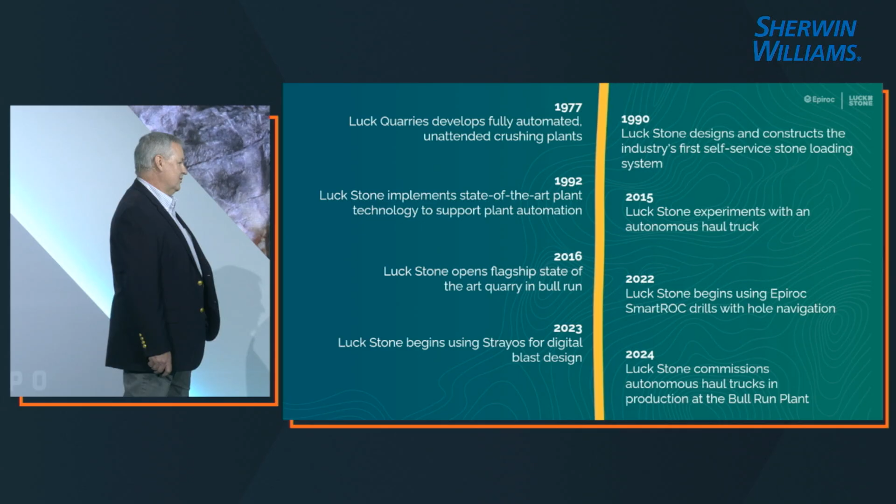In 1990, we designed and constructed the industry's first self-serve stone loading system for our customers' trucks. And 2 years later, in 92, we developed state-of-the-art plant technology to enhance the way our plants ran. Today, at almost all of our operations, our plants continue running through the evening and well into the night after everyone has gone home to spend time with their families. These autonomous, automated plants, while they run, help our business be efficient, make sure that we have product available for our customers, all while serving our own associates. They help us make sure that our associates have good work-life balance.

In 2015, we started our first autonomous haul truck trial. That was a trial that lasted a couple of years. We had an autonomous truck running in our pit. We learned a lot through that experiment. Unfortunately, it did not succeed in the end. We did, however, learn a lot from the experience, and caught a glimpse of what was possible in the future. Fast forward 9 years to 2024, and Luck partnered with Caterpillar to bring autonomous haulage to the aggregates industry. We commissioned a fully autonomous haul fleet at our Bull Run site, a fleet that continues running autonomously today and has hauled more than 2.5 million tons to date.

About 5 years ago, we started laying the foundation for autonomous drilling. This started with the use of 3D shot design for our blast planning and the implementation of hole navigation systems on our SmartROC drills. I'm excited to say that we have now commissioned a fully autonomous Epiroc SmartROC D65 drill at our Rockville site. This represents the first fully autonomous drill working in quarry operations worldwide.

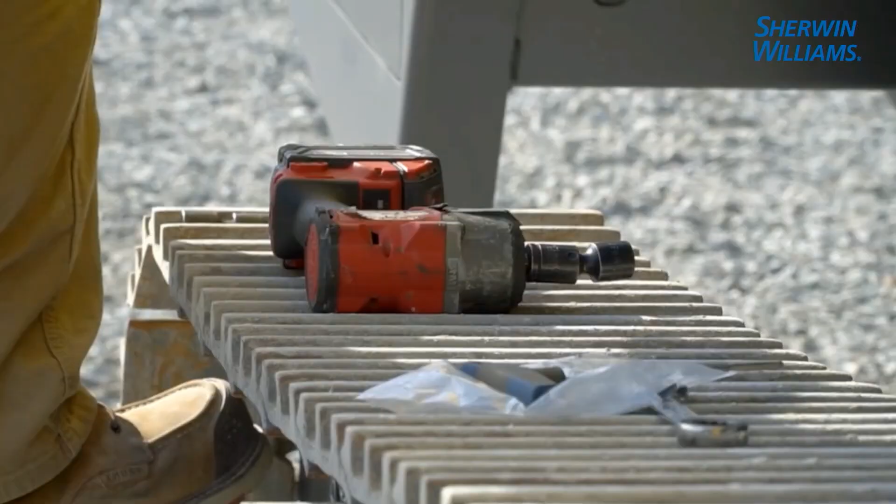My name is Pat McGrath. I work for Luck Stone. I am the pit services manager. We're at the Rockville Quarry this morning to commission a D65 for an autonomous trial in partnership with Epiroc. It's extremely exciting that the drill is here, and we're going to begin trialing it soon. We want to see what we learn from this technology.

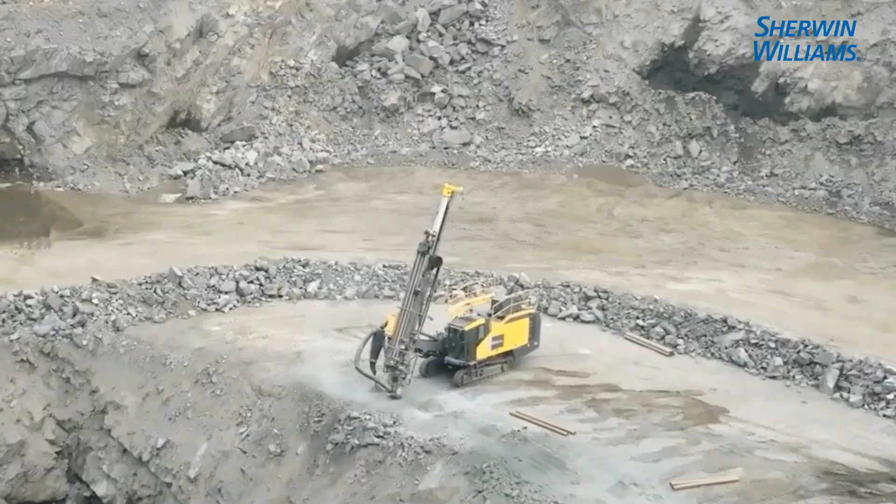We've been embarking on semi-autonomous features with the drills for the last couple of years. We've been pairing that with 3D designed shot patterns that we've been exploring on our blasting side. We see this as the next logical step. The ability to remotely upload a shot to an autonomous drill and have an operator monitor one or more remotely, and see what that does to empower our associates across the footprint of the company and allow everybody to grow.

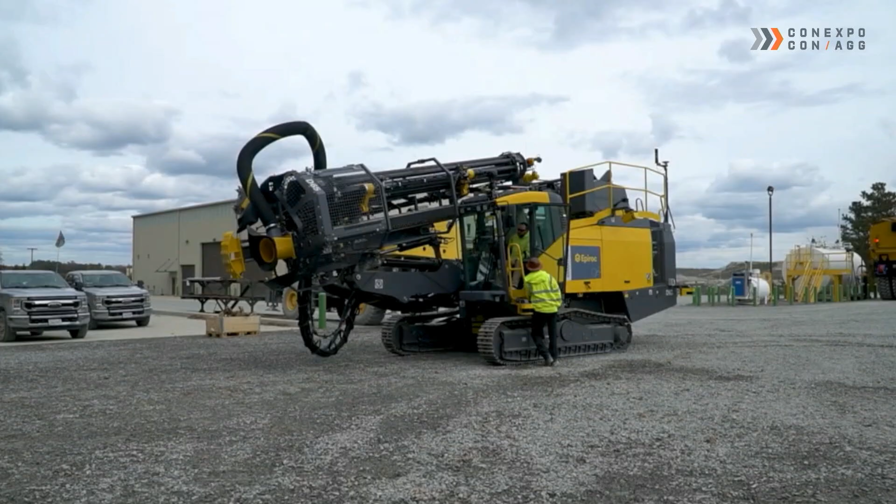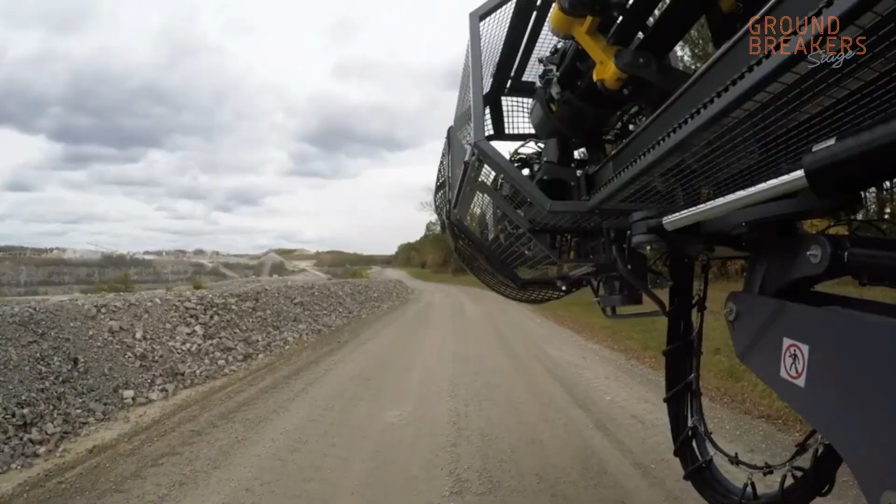So we're building a network here at Rockville, and we see that as being a part of the future at all of our plants. So it's a nice component to this trial. We're going to start off by just running the drill through its paces manned for a couple of weeks, get some baseline productivity numbers. Then we'll step back to tele-remote operations, learn what we need to learn to make that work, and then step back to fully autonomous when everybody's comfortable with it. We're very excited to see just what we can get out of a fully autonomous D65.

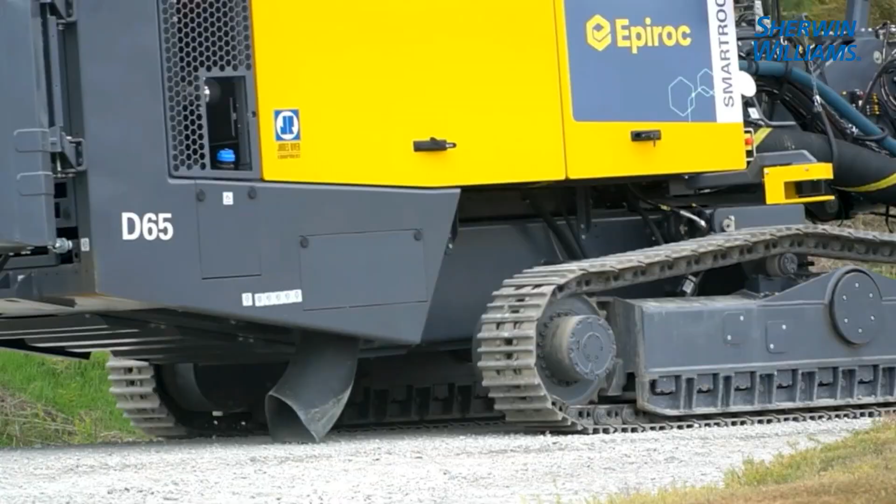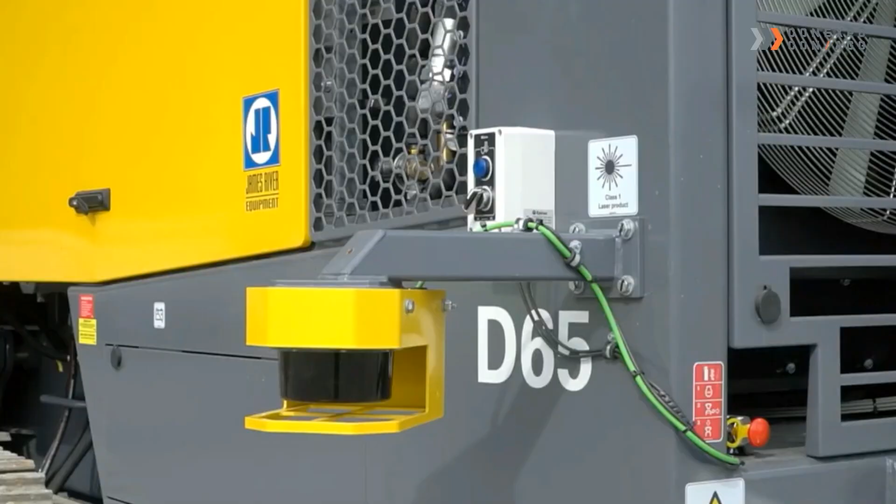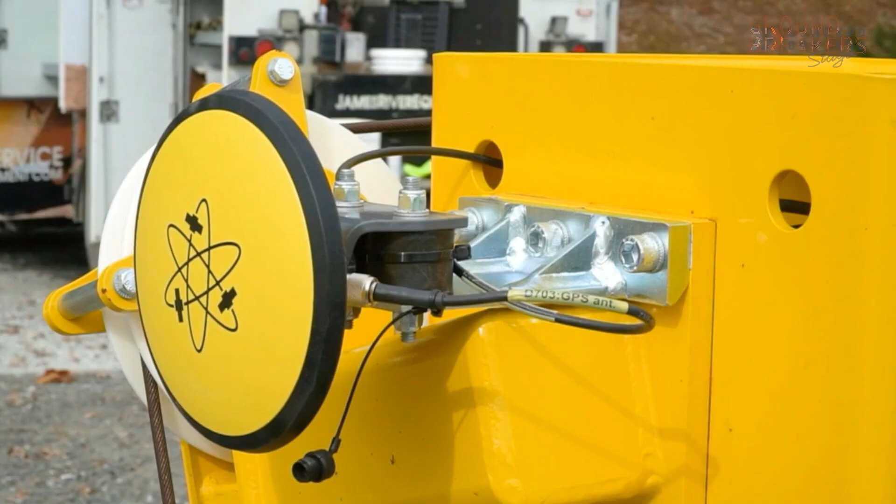I work for Epiroc on the technology and automation team. Today we're here to commission the autonomous D65 for Luck Stone in Rockville, Virginia. Today we're installing the additional equipment needed to make the rig autonomous, which will include the lasers for obstacle detection, additional cameras for views around the rig. Then we're also going to begin the process of commissioning the base machine.

This has been the first autonomous SmartROC D65 in the U.S. Luck Stone has agreed with Epiroc to allow us to gain access to data for the future of getting operators away from the machine, out of dangerous areas, the ability to grow our offer of what we can do as a company and the capabilities of our machines.

So you may be thinking, why invest in this sort of technology? It is quite an investment. There's capital required for the equipment. There are ongoing autonomy-related data and infrastructure costs. There's change management associated with new workflows, new policies, procedures, training for operators. And don't forget the human element, because we're generally risk-averse creatures that don't like change, especially if it affects our livelihood. For Luck, the reason for why is in our mission, which is igniting human potential.

We see investment in technology like this as a significant opportunity for our associates to grow and learn and be empowered in new ways. Second driver is labor availability. Today's workforce is increasingly looking for jobs that are interesting and challenging. They're looking for employers who will make sure that they're exposed to new technology that will challenge them, help them grow, and become all that they can be.

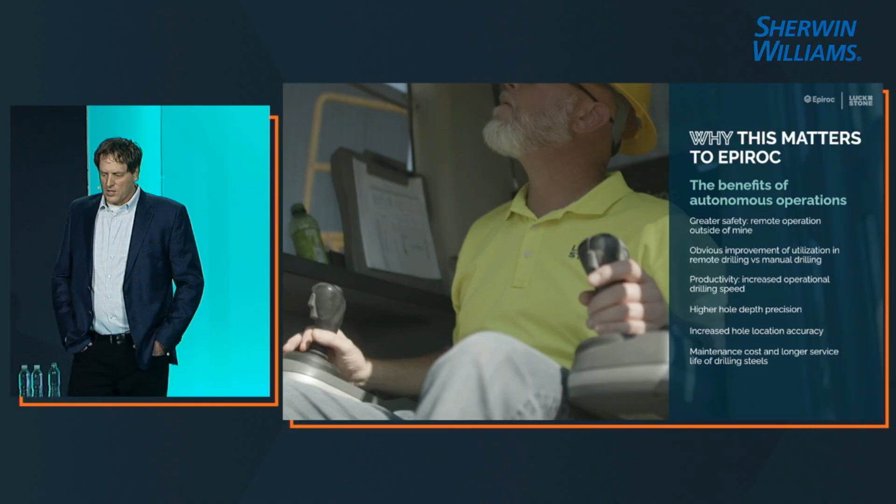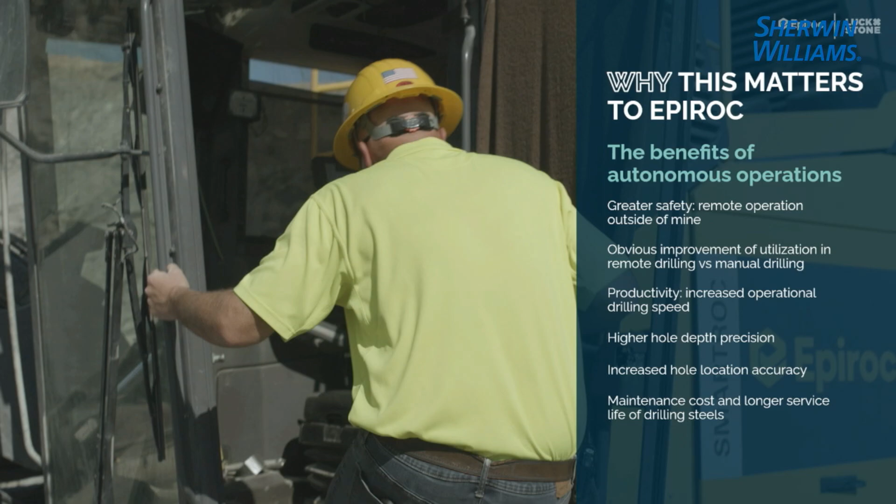So let's talk about a few of the key benefits. Safety: we keep the workers out of high-risk zones and we reduce exposure to hazardous conditions. Utilization: mining operations must drill more meters with higher precision and meet a growing demand. And labor shortages, which we'll talk about in a few minutes, but many of the mining and infrastructure sites are experiencing a bit of a labor shortage. Environmental regulations: autonomy enables more efficient energy usage, reducing fuel consumption and emissions. And finally, cost reductions. Autonomous drilling lowers the cost per meter by optimizing performance, reducing wear on the equipment, and minimizing human errors.

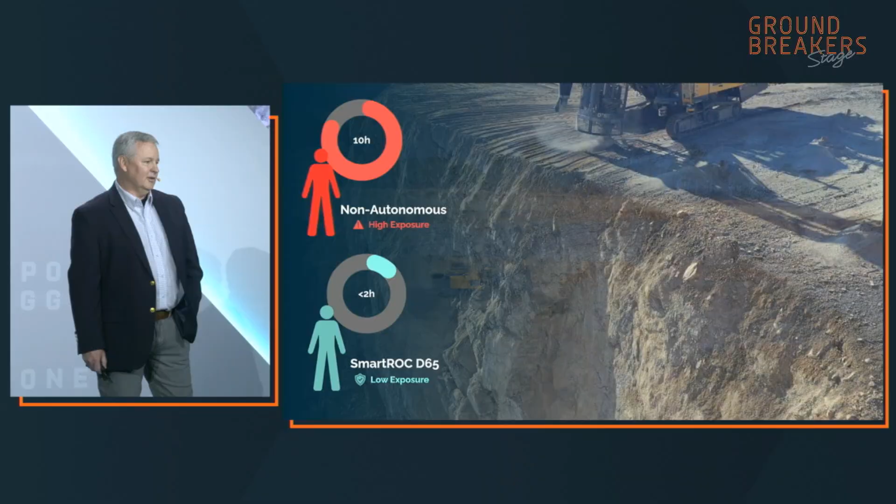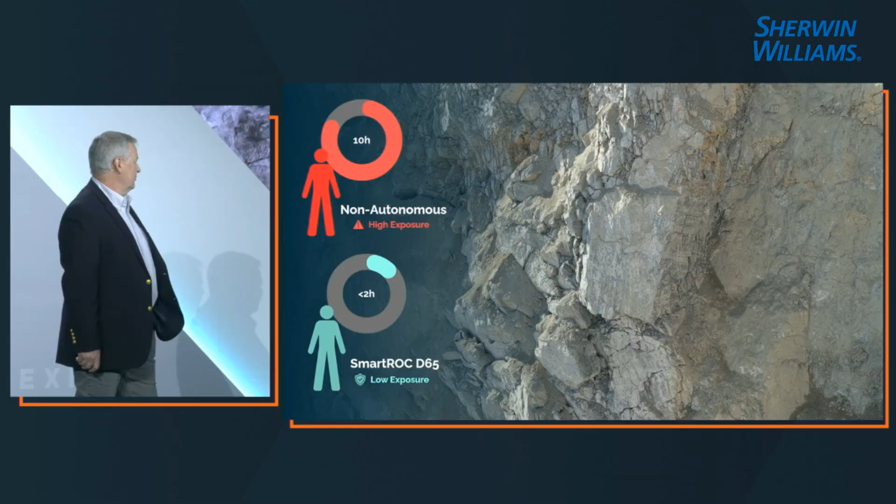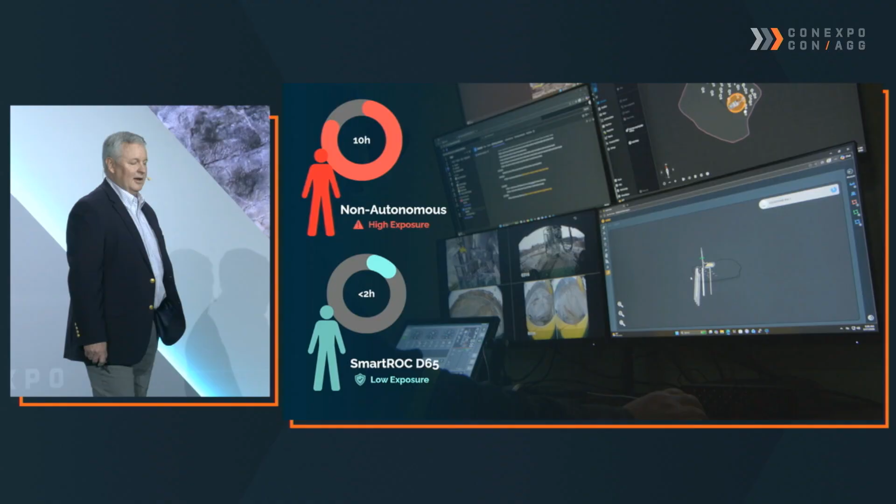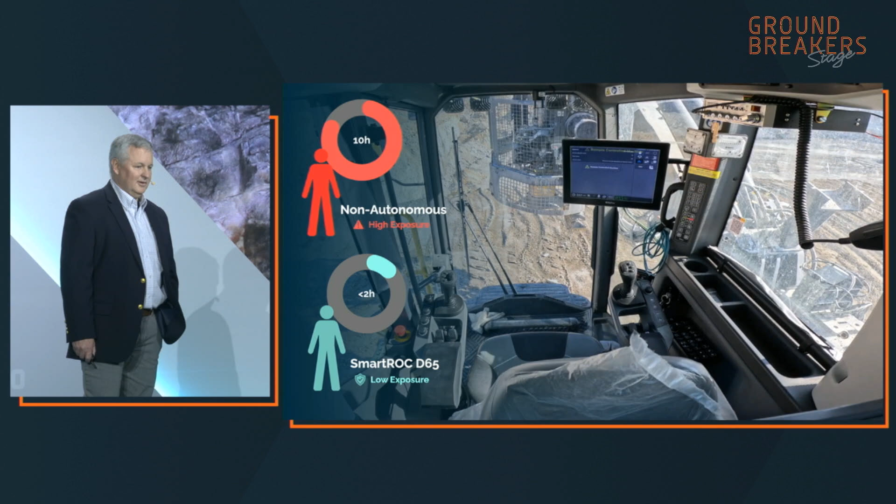The nice thing about autonomous drilling is it reduces the time significantly that an operator spends on the mine face. Traditionally, the operator spends the majority of a shift working on the mine bench, exposed to the hazards there. These are hazards such as mobile equipment working in the area. There are drop-offs at the crest when we're drilling frontline holes, like the video is showing now. If you're drilling backline holes, you might be near the base of high walls where there could be a falling material hazard. They're also exposed to vibration, noise, and dust, and slip and trip hazards on the bench.

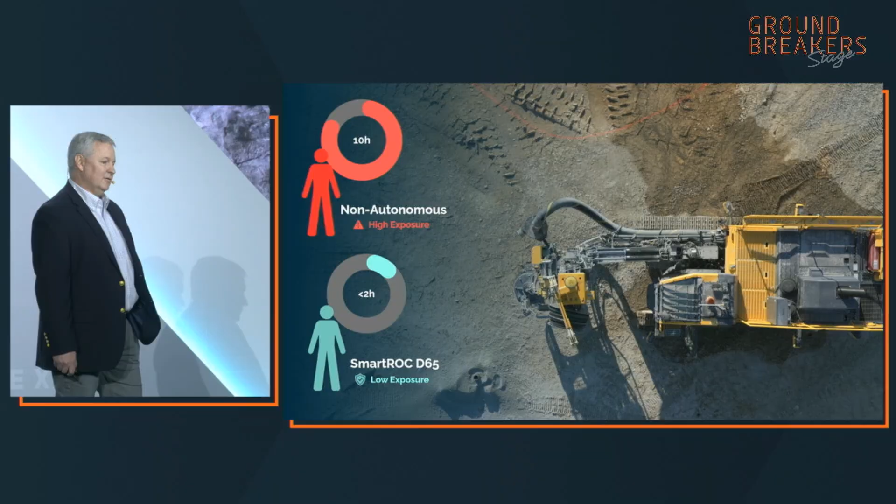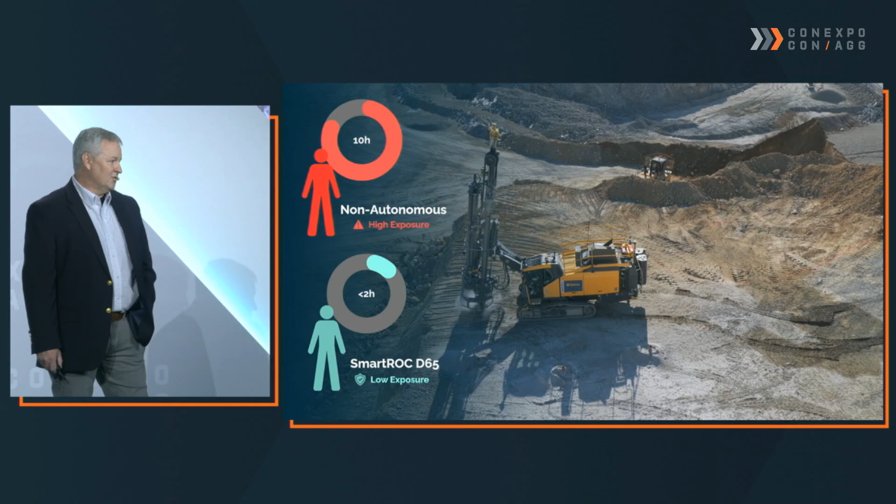An autonomous drilling solution does not completely remove the operator from the field. Some functions still have to be performed at the drill. These are things like pre-shift checks, fueling and lubing the equipment at the beginning of the shift, adding water to the tanks, checking and cleaning the sensors. You still have to check the hole depths and add collar tubes, and change drill bits. Although that last one may become a thing of the past because auto bit changers are on the horizon.

The amount of time that the driller needs to spend on the bench can be reduced by 80% or more. And when work does need to be done at the drill, it can be in an area of the driller's choosing, the lowest hazard, safest area available, away from the bench, for example.

Thanks, Chuck, for sharing the inspiring story about Jason. The dedication and commitment that Jason has demonstrated so far with the project, it's commendable. And we look forward to seeing where Jason and the Luck Stone team take drill automation in the future. It was really cool seeing Jason show up to work here in Vegas to perform his job out in Virginia this morning.

So when designing automation, there are two fundamental aspects around people that must be considered. These are human-centered design and human system integration, which are embedded in the way that we develop Epiroc automation solutions. So first up is the human-centered design. This ensures that we deeply understand users, their tasks, their context, and that we design solutions around the real human needs.

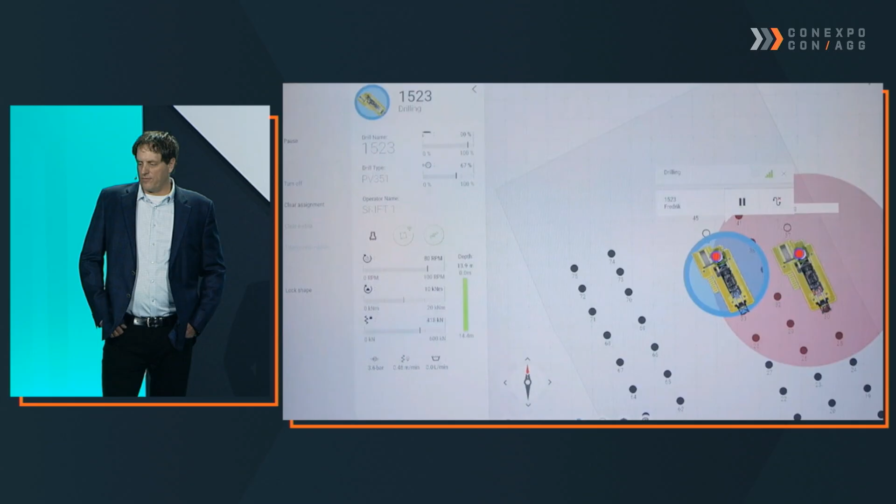Automation not only improves the operator experience, in some cases, it has been a key enabler in creating entirely new roles. So, for example, at the Codelco mine in Chile, a group of local people were hired with no prior experience in mining or drilling, and they were trained as control room operators. Through a structured training program, they quickly developed the required skills and operational understanding to operate a fleet of autonomous drills at the site. Today, their contribution forms part of an operation that ranks among the most effective and productive within the country, and their productivity and efforts are also recognized at a global level. This is a powerful example of how automation, when designed with the people in mind, can elevate both operational performance and the human experience at work.

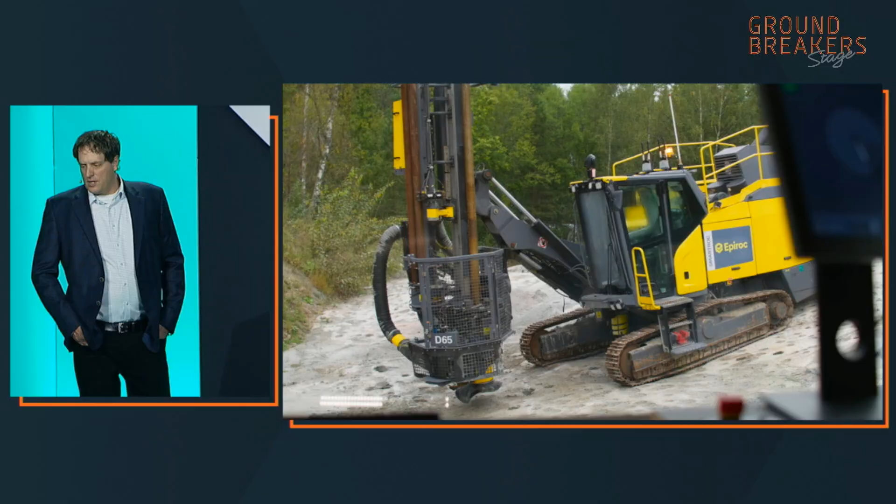As automation changes the nature of work, we work with our customers to ensure that they have the proper skills and knowledge required to operate the autonomous systems. Across our operations, we see roles evolving rather than disappearing. Operators, controllers, and service personnel have been moved from very hands-on repetitive tasks towards roles that require higher levels of system understanding, analytical thinking, and collaboration at the site. So with technology comes the need for training as job roles get redefined.

A successful autonomous implementation will require structured training programs, digital tools, and close collaboration within the site and with the customer. We support this transition as part of our implementation blueprint, ensuring that people are equipped not only to operate the automated systems, but to trust them, manage them, and continuously improve upon them. When structured properly, automation becomes a catalyst for professional growth and long-term capability building, rather than a threat to any employment.

So the new standard. Technology is transforming industries and really all aspects of our lives. We are committed to empowering our people with leading-edge technology, protecting our employees by removing them from exposures in the field, and increasing machine utilization and efficiency, and ultimately lowering the total cost of ownership. We at Luck are excited to continue this partnership with Epiroc, and we look forward to what the future may bring.